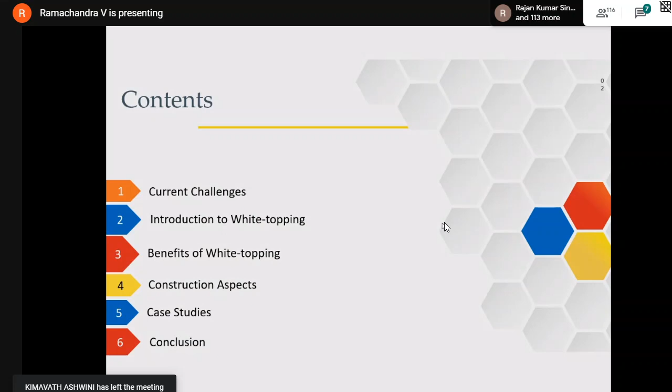Now let us go ahead to understand what is white topping, and what are the current challenges that we have on our Indian roads.

As you all know, potholes are the biggest threat to our country. Just to give you some numbers, pothole related deaths in our country were close to 3,600 deaths in India in the year 2017. In the same year, deaths related to terror related incidents due to terrorists were about 800 people, but only due to potholes, 3,600 people died. Therefore, just look at how serious this problem is.

Therefore, yes, I agree terrorism is a very big problem, but much more than that is the problem with these potholes, which we are not aware of. Therefore, having a pothole-free road should be our aim.

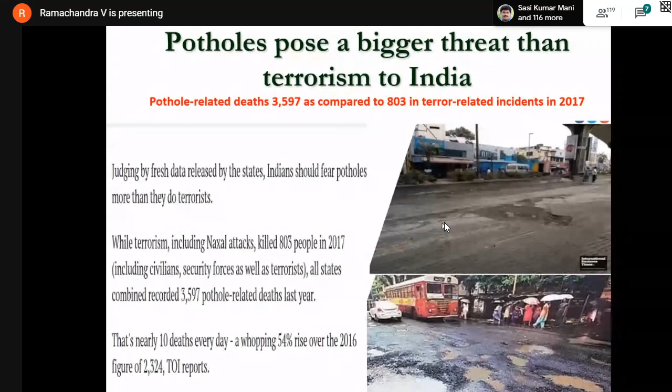Now, white topping can provide an excellent solution, particularly to eliminate potholes. There is a High Court judgment also of the High Court of Maharashtra. They have said that right to good roads is a part of fundamental rights of citizens. This judgment has come in the year 2015.

That was when somebody who was affected by the quality of roads in Maharashtra filed a petition in the High Court. They said because of potholes, somebody died in their family, and they went to the High Court. The High Court said that demanding good roads is a part of our fundamental rights as citizens of this country. Therefore, why I am saying this is that having good roads is very essential for our country, and we all should strive for that.

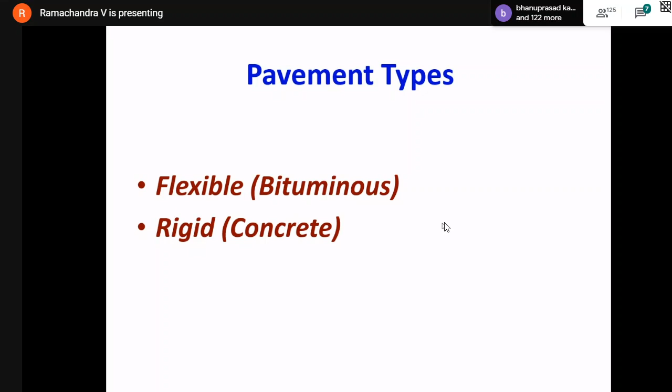Friends, as all of you know, your professors have taught you that there are mainly two types of roads. One is called the flexible pavement, which is a bitumen pavement. The other one is a rigid pavement, that is concrete pavement. There is a third variety also called composite pavements. In fact, white topping comes under composite pavements, where you have the bitumen layer below, and above that you have a rigid layer. Sometimes it is also called a composite pavement.

Now, what were we doing earlier? What was our past choice? We were normally going in for bitumen pavements always. What was the reason? It was because lack of funds was one of the reasons. In earlier days, in the 70s, 80s and all that, the cost of bitumen was very low, and whatever you can build, the cost of building 1 kilometer of concrete road, you can build 2 to 2.5 kilometers of bitumen road. Therefore, people thought, why do I spend money and build only 1 kilometer of concrete road? With the same money, I can build 2 or 2.5 kilometers of bitumen road. Therefore, that is always better for me, let me go in for bitumen roads.

But today, that is not the situation. Bitumen prices have gone up very steeply in recent decades. Therefore, the comparison between concrete pavements and bitumen pavements, even if you consider new roads, apple to apple comparison, the cost difference is not much. It is hardly about 10%. Therefore, this reason is not valid today.

Second thing is amenability to stage construction. In case of bitumen pavements, suppose we design that we need so much thickness of bitumen. Maybe as engineers, we would decide, no, I don't have so much money today, therefore let me construct only a small thickness now and add some more thickness 2 years later and some more thickness another 2 years later. That means stage construction is possible in case of bitumen pavements, whereas in case of concrete pavements, this facility is not there.

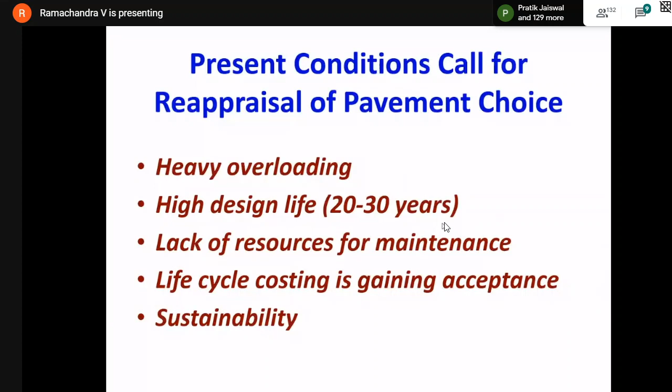Therefore, you don't have to spend money every 2 or 3 years for maintenance; resources for maintenance can be conserved. And these days, life cycle costing is gaining importance. I told you initially concrete roads may be expensive, but if you take the life cycle cost, the total cost over 25 to 30 years, concrete roads are much, much cheaper than bitumen roads. And concrete roads also contribute to sustainability, which I will cover in the second part of the lecture.

Now, this is the photograph of the Marine Drive Road in Mumbai. It is a cement concrete road, constructed in the year 1939. At that time, there was no ready-mix concrete available. It was manual concrete, there were no pavers, and with manual paving, this road was constructed in 1939.

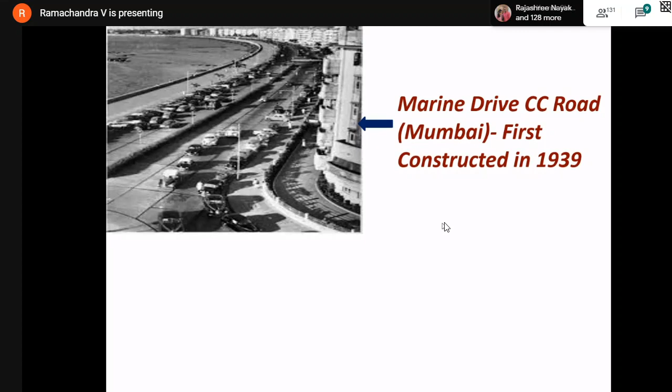You would appreciate that in Mumbai, even in the 1940s, road traffic was there, and more than that, the road is right next to the sea. So the chloride attack, the saltwater effect of seawater on the road and its subgrade, is always there 24/7. This road, constructed in 1939, lasted for more than 70 years, 73 years to be precise. So it was only in 2012, just 8 years back, that a new layer of concrete was put over the earlier layer. This road in Marine Drive has lived for 70 plus years and given excellent service.

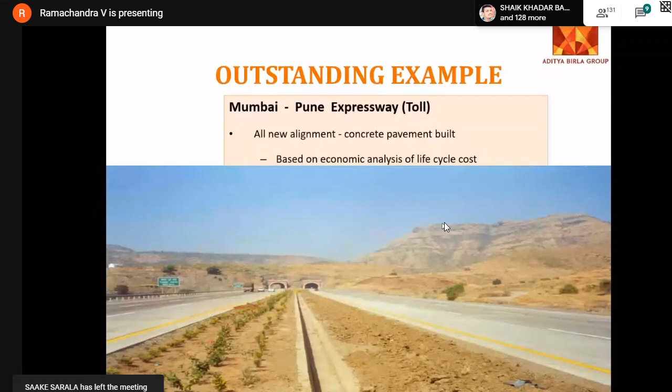Now there are several other examples. Take the Mumbai-Pune Expressway, built in the 1990s. It has already given service for more than 25 years and is giving excellent service to the nation. The recent one is the Yamuna Expressway between Noida and Agra, and the extension of that from Agra onwards.

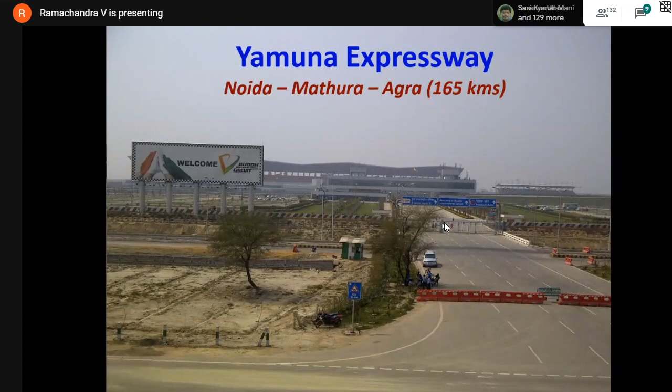This is the first phase of 165 kilometers of roads. This is an 8-lane concrete road, and you can see the view of it. It is an expressway where people travel at a speed of 140, 150 kilometers per hour. This is the sports stadium on one side of it. The quality of road is so good.

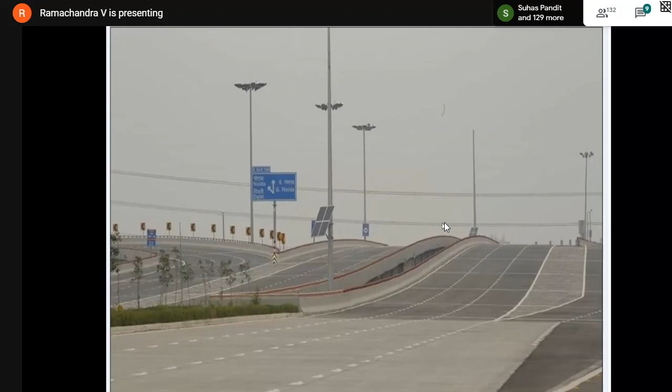One advantage of this road is that it is built with blended cement, that is PPC, not OPC. Generally I have heard people say that if you are constructing anything with high strength concrete, let's say M40 or M45 grade, you should always use OPC and 53 grade cement. But this road is built with PPC, Portland Pozzolana Cement, which is a blended cement with 30% fly ash.

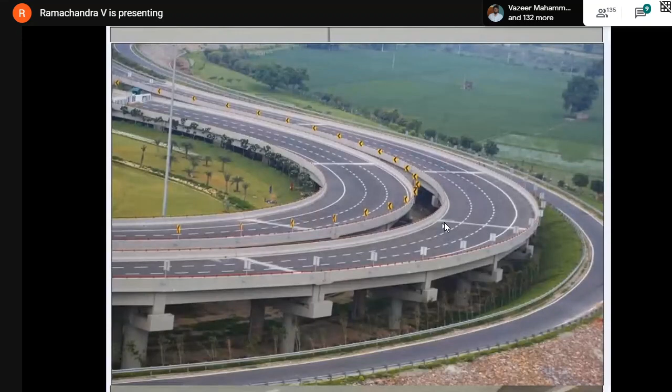Now you can look at the quality and performance of this road. This is not inferior to any roads you see in advanced countries. This is as good or even better than that. These are some other views. In fact, this road, which is close to Delhi, has also been tried out. When traffic was stopped, even Air Force planes, in case of emergency, can land on this road. That also has been tried on this road.

Now, coming back to bitumen pavements, as you all know, bitumen pavements have a lot of problems.

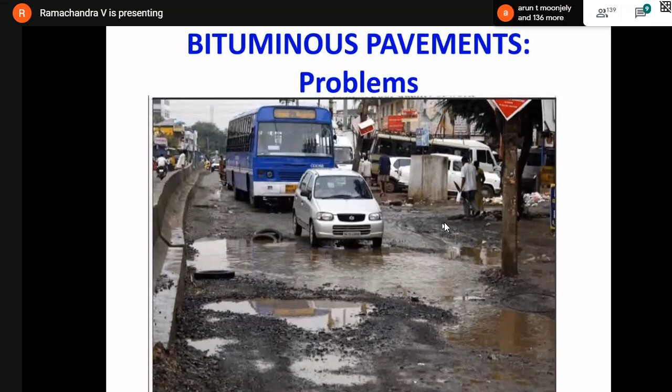Don't look at the color of the bus and think that only that particular city is very bad and my city is very good. I'm not just showing one photograph of Tamil Nadu; this is the problem everywhere. Any city you take, after a rainy season, particularly if the rains are very high, this is the kind of potholes you get almost in every city in India, whether it is Hyderabad, Vijayawada, Bangalore, Delhi, wherever it is.

Sometimes we wonder whether we are doing rainwater harvesting on our roads, it is so bad sometimes. That is the state of bitumen roads. Though we say bitumen roads should last for 5 years at least, in many places we have seen it go bad even after 2 years. After 1.5, 2, or 3 years it goes very bad, so you have to put one more layer of bitumen. You can't wait for 5 years.

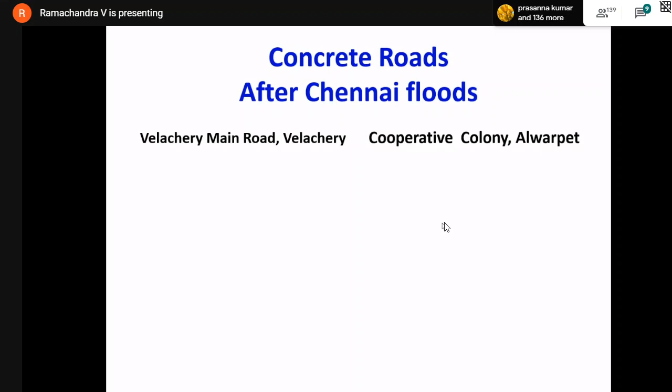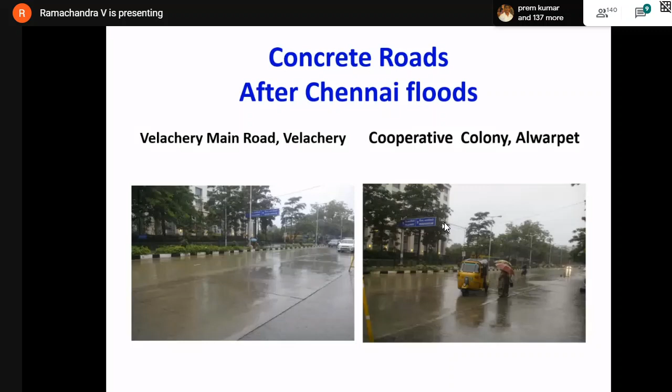We did a study in Chennai. This was the state of bitumen roads, whereas white topping, which was done in Chennai since 2012 -- Chennai has done more than 100 kilometers of white topping -- we studied the condition of this white topping after 7 years and very high floods in Chennai. After very high floods, this is the status of concrete roads in Chennai. You can see this after very heavy floods, with water standing on the roads for 7-8 days: concrete roads had no problem, whereas bitumen roads deteriorated.

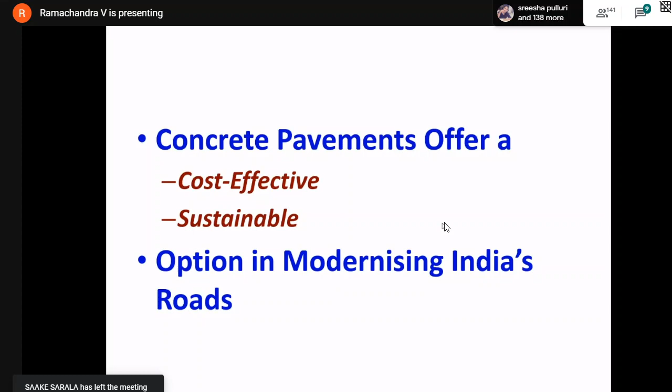Therefore, my point is that concrete pavements offer a very cost-effective and sustainable solution to India's roads. That is what I would like to say.

Now, before we go to the design aspects of these concrete roads, let me tell you a few things about load and its distribution. Your professors have taught you in strength of materials that pressure or stress is always equal to load divided by area. Now if a load of, let's say, 3000 kgs is moving on a road, what is the pressure or stress on the concrete, on the pavement below that? It is load divided by the cross-sectional area.

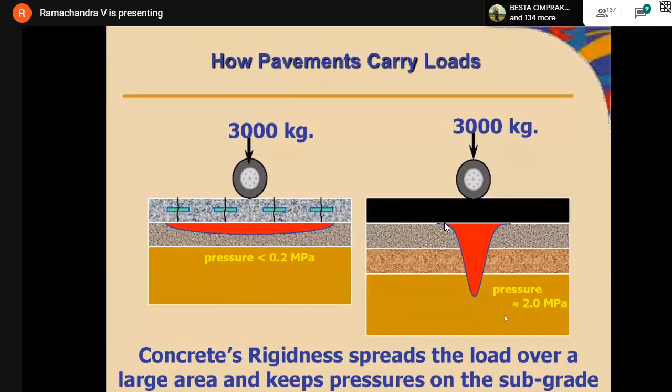Whereas in case of bitumen roads, it is 2 and in concrete it is 0.2, so the ratio is more than 10. That is the reason why in concrete roads the stresses on the pavement are much less than what you see in bitumen roads, and that is the reason for the long life of the structure.

Now I have a question for you, though in a digital lecture you can't answer. This is a question I generally ask students. Consider two cases: an elephant moving on the road, and a lady like Aishwarya Rai walking on the road. Who damages the road most? Remember, elephants weigh about 4,000 kgs. A 4,000 kg weight moving on the road versus Aishwarya Rai moving on the road - who damages the road most? This is the question to you.

Now let us analyze scientifically. Take Aishwarya Rai as well as the elephant. I know elephants generally weigh around 4,000 kgs. I really do not know how much Aishwarya Rai weighs, but I have assumed for my calculation that she weighs only 60 kgs.

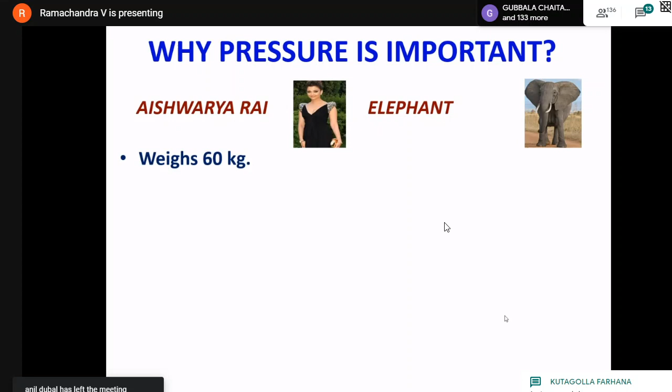She stands on shoes with pointed heels and toes, high-heeled shoes that she walks on. Therefore, pressure equals load divided by area: 60 kgs divided by 2 legs, each with 2 points, into 5 square centimeters per point, which is the area of cross-section. Dividing by all that, you get a pressure of 3 kg per square centimeter, or 0.3 Newton per millimeter squared in SI units.

Now let us go to the elephant. It weighs 4,000 kgs and stands on 4 legs, and each of these legs is quite wide - each leg measures 20 by 20 square centimeters. Therefore, load by area: 4,000 divided by 4 into 20 and 20. The pressure comes to 2.5 kg per square centimeter.

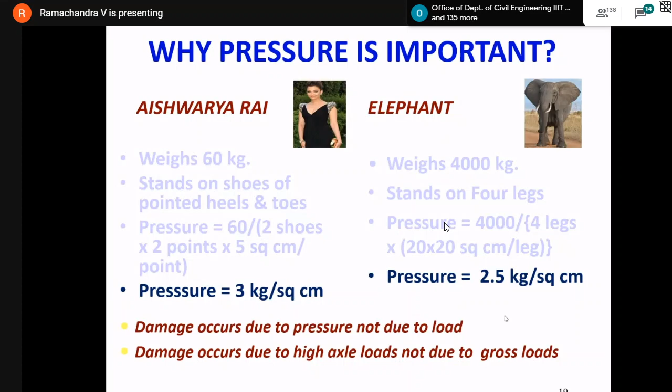Therefore, now the question is answered: Aishwarya Rai walking on the road damages it much more than an elephant walking on the road. Why I took these two examples is just to show that the load does not matter. What matters on roads, and what you must account for in design, is that damage always occurs due to pressure, not load.

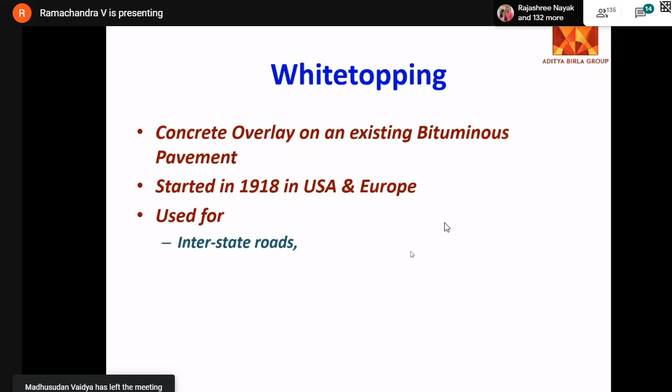As I said, a concrete overlay on an existing bitumen surface is called white topping. This is not a new technology - it started in the USA and Europe long back, in the 1900s and 1920s. It is used for all kinds of roads, whether interstate roads, primary and secondary highways, urban roads, or airports. The PCC, plain cement concrete used, is generally of grade M40. This overlay may or may not be bonded to the bitumen layer below. Now, what do we mean by this?

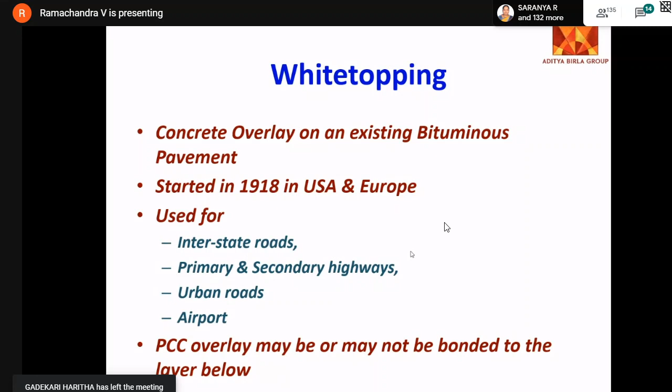That definitely there will be some bonding. An old bitumen layer is there, you have milled that, and above that you have put a concrete layer. Therefore, definitely there is some bonding, whether you consider that bonding in the design or not.

It may be bonded or it can be unbonded also. Before we go to the difference between bonded and unbonded, let us look at what is the white topping history in India. This started around 2000-2002 in places like Mumbai, Pune, Nagpur, and later came to Chennai. Then in South India, the first road was done in Bangalore, followed by Chennai and then Hyderabad.

Indian Roads Congress, based on practical experience in Mumbai, Pune, etc., brought out a special publication, SP76, in the year 2008. It was then revised in 2015. This is the first IRC code, SP76, and the later revised one available right now is SP76 of 2015. This is the latest code, and you can get a soft copy or hard copy from the IRC website.

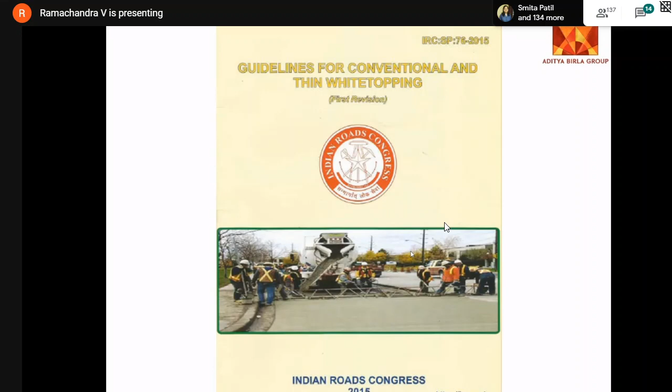Now, before we go ahead on white topping, let us look at the economics. This is the first question people will ask: compared to my bitumen road, how much more expensive is the white topping? As I said earlier, if you compare a new concrete road and a new bitumen road, the difference is hardly 10%. Whereas in case of white topping, the difference could be around 20 to 25%.

Let us take one standard case. For a standard case of a 1 kilometer road, 2 lane, meaning each lane is 3.5 meters wide, so the width of the road is 7 meters, 1 kilometer length, and the thickness of concrete is 150 mm, designed based on the IRC code. We designed the bitumen road also based on IRC 37.

What will be the cost, for a particular city - this I calculated last time for Hyderabad city. The total cost was coming to about 63.5 lakhs per kilometer for bitumen, around 63 lakhs. Whereas white topping would cost 76 lakhs. That means about 21% higher than the bitumen road - the initial cost is high by 21%.

Let us look at the maintenance cost. Initial cost I have taken from the previous slide: 63 for bitumen, 76 for white topping. Now after 5 years, you have to put bitumen concrete of 25mm, which would cost 18 lakhs. After 10 years, you have to put DBM of 40, dense bitumen macadam of 40, and BC 25, that comes to 45 lakhs. Another 5 years later, that means 15 years later, again one more BC you have to put, it will cost 18 lakhs. Therefore the total cost of construction will come to 144 lakhs.

Whereas in case of concrete white topping, initial costing is 76.7 lakhs, and maintenance is bare minimum - just maintenance of the joints. I have taken a very rough cost of 5 lakhs, though it will not cost that much, hardly 1 or 2 lakhs, not more. Even taking 5 lakhs, it comes to 91 lakhs.

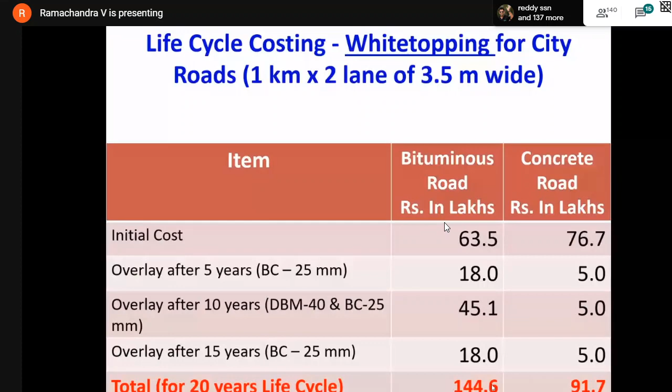If you take the life cycle costing for 20 years, white topping would cost 91 lakhs, whereas in the same 20 years bitumen roads would cost 144 lakhs. I have taken the present worth of all these values. Therefore, you can see that concrete roads are much, much cheaper in the long run if you consider 20 or 30 years of life.

There is no need actually. If you directly put concrete over the milled bitumen surface, there is some roughness of the surface. Therefore, there is always some amount of bonding between concrete and bitumen.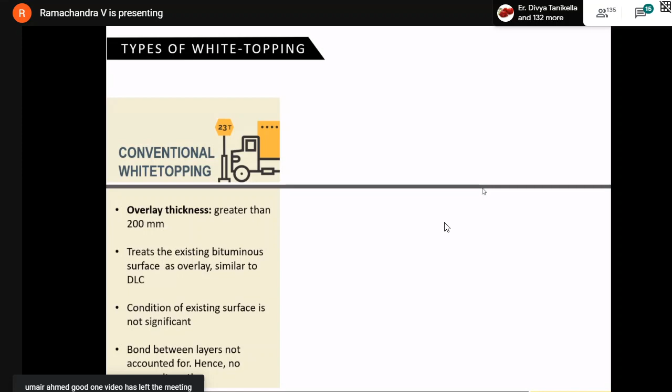The next one is thin white topping. Thin white topping is what you see in most city roads today. In this case, the overlay thickness of concrete is between 100 and 200 millimeters, that means 4 inches to 8 inches. The bond between layers is considered but not mandatory.

But look at the last point here - the joints are always at a very short spacing of 0.6 to 1.25 meters both ways. I'll show you photographs on this. The third variety is called ultra thin white topping. As the name itself says, the thickness is less than 4 inches, less than 100 mm. Therefore, it is called ultra thin white topping.

Generally this is not used for Indian roads. It is used only for internal roads where heavy traffic is not likely, suppose you have a colony, the inside roads of a small colony or gated community - there we can use 3 inches, 4 inches of concrete. Even in this case, the joints are at a shorter spacing of 0.6 to 1.25 meters. So the 3 types of white topping are just dependent on total thickness: 200 millimeters and above is conventional white topping, between 100 to 200 is thin white topping, and less than 100 is ultra thin white topping.

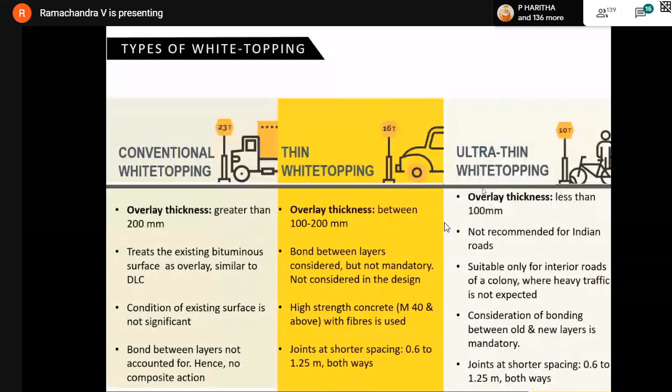But what I generally discuss when I say white topping is the second one, the thin white topping, which is more popular and is normally followed on our Indian roads.

Here you can see in this photograph, the joints, the groove cutting, are very close. This is the case of road number 10, Banjara Hills in Hyderabad, where this road is still doing well - it's already 6-7 years now, giving excellent service, and you can see the joints are hardly 1 meter by 1 meter, not like the earlier concrete roads of 3.5 or 4.5 meters.

Now, your professors have taught you in strength of materials that the stresses are directly proportional to the span. If it is a fully supported subgrade, it is proportional to L. Therefore, if the length or span is more, the bending moment would be much more; if the span is less, bending moment is always less. Therefore, a lesser span of 1 meter always helps in reducing the bending moment, reducing the flexure on concrete roads, so the thickness is also reduced - not like 250 or 300 mm, it is hardly 150 mm. This is the reason - because the spacing is reduced.

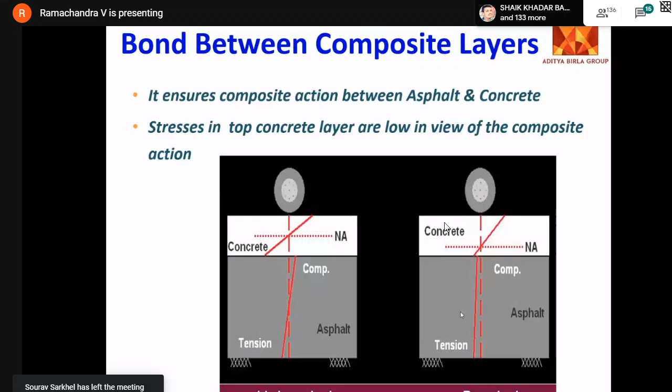Now, because of this, how much would the stress reduce? For this, I have taken the particular case of Nice Road in Bangalore, where this calculation was done. If you consider no bonding versus 100% bonding, and in between let us consider 25% bonding, you can see the stress reduction: even with 25% bonding, stresses are reduced by 26%. With 100% bonding, stresses are reduced by 58% - a huge decrease in stresses in case of concrete road.

If there is no bonding, the stress on concrete comes to 6 MPa. With 25% bonding, the stress comes to 4.4 MPa, which is 26% less. With 100% bonding, it comes to 2.5 MPa. This is what you are seeing in this graph - the stress in concrete greatly reduces due to consideration of bonding.

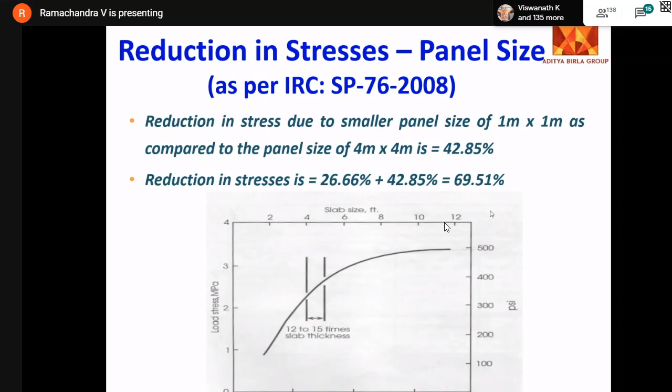Second thing is the panel size. Normally you take a 4 meter by 4 meter panel. Compared to that, in case of a 1 meter by 1 meter panel, which we do in white topping, the stresses are reduced by 42%. Therefore, if you add these two stresses - stresses due to bonding plus stresses due to reduction in spacing - the total reduction comes to 69 or even 70%. So compared to a normal concrete road of 4 meter by 4 meter, the stress reduction is 70%. That is the reason why white topping has lesser thickness.

Now, I am saying white topping is very good, but there are certain cases where white topping is not an option. We should know that while white topping is very good most of the time, it is not an option in at least some cases.

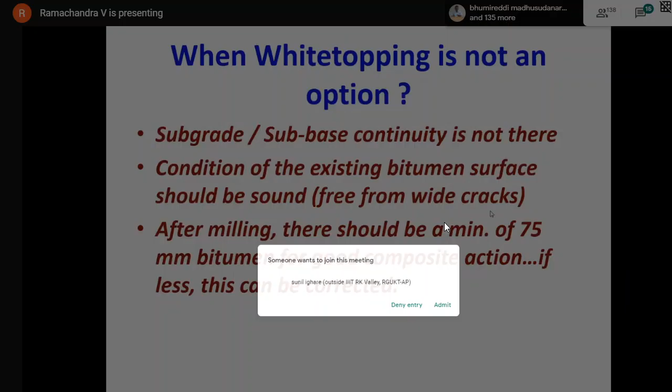What are these cases? When the subgrade or subbase continuity is not there - meaning when the subgrade and subbase are different. Sometimes you will see this in case of bitumen roads. Earlier a road was, say, 5 meters, then there was an expansion on both sides, a widening, and it became 7 meters. Now there is no subgrade continuity.

Then a correction is possible - you can put one layer of DLC, dry lean concrete, and over that put white topping. Second, the condition of the existing bitumen surface should be sound, meaning free from cracks. Third, I told you the top 1 inch should be milled out, and after milling there should be a minimum of 75 mm of bitumen remaining for good composite action. If it is not 75 mm, whatever is the difference, you can put dry lean concrete to that thickness, and above that put white topping. So solutions are available.

Now, what are the benefits and advantages of white topping? As I said, bitumen roads can stay for only 5 years, whereas white topping can last 20 to 25 years. There is fuel saving and emission reduction - I will explain this in the second half of my lecture. There is also energy saving, road safety is much better, and sustainability is much superior. Each of these I will explain in the second half of my lecture.

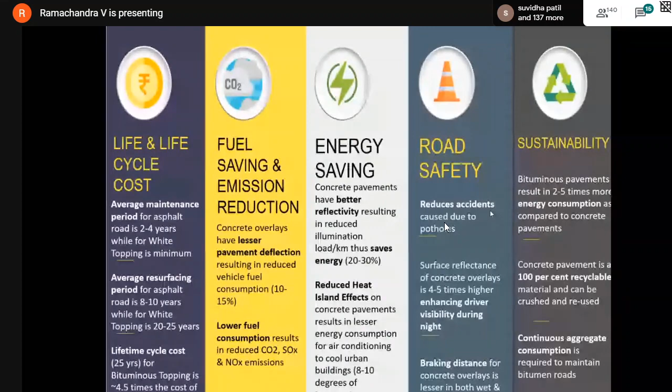Cost comparison I have already done, so let us go ahead now to braking distance and road safety.

Braking distance - all of you know that when you apply brakes on a car or bus, after what distance it stops. In case of bitumen roads, it stops at 190 feet, whereas in case of concrete roads with a dry surface, 162 feet is sufficient. Bitumen takes 190 feet. Therefore, the braking distance is always least in case of concrete roads.

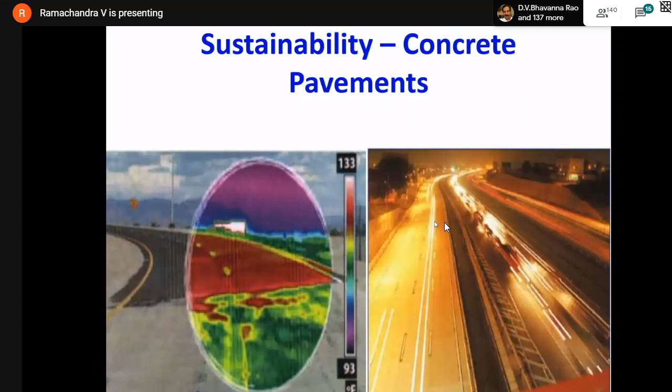Sustainability of concrete pavements. As you can see here, with the same number of electric poles on both sides, the bitumen road appears dark while the concrete road appears white, because concrete reflects light better. Near Belgaum, on the National Highway Golden Quadrilateral, one side was built as concrete road and another as bitumen road just to study the performance comparison. Concrete roads are always better.

How do we start the construction aspects? Let us now come to the construction aspects.

In case of concrete road, before doing anything, we should characterize the existing bitumen road, that is, determine its condition by visual inspection, and conduct laboratory and field tests such as the Benkelman beam test or the falling weight deflectometer test to determine the roughness of the surface or the modulus of subgrade reaction.

Coming to the PQC requirement, that is pavement quality concrete requirement, we should always go for M40 grade of concrete, so that the flexural strength would be in the range of 4.5 Newton per millimeter square.

The cement content and slump should be left to the designers. When we do the mix design, we can ensure that the cement content need not be very high, need not go to the maximum level of 450 kg per meter cube. By trials, with around 400 kg of cement, you can get a good concrete mix.

And what about the slump? It depends on the paver machine that you are using.

Oh, I think it went off. Yeah, I'll come back.

In concrete technology, you can use admixtures - mineral admixtures and chemical admixtures. Mineral admixtures means you can use fly ash, or GGBS, that is ground granulated slag. Use of chemical admixtures is very essential in case of high strength concrete.

This is about the slump test, which we must always do. All of you do this test in the concrete lab - you take a slump cone, make concrete, and put it in 3 layers, tamping each layer manually 25 times, filling it up to the top. Then you lift the slump cone, and the concrete slumps. You measure the difference between the top level and how much it has gone down - that is the slump.

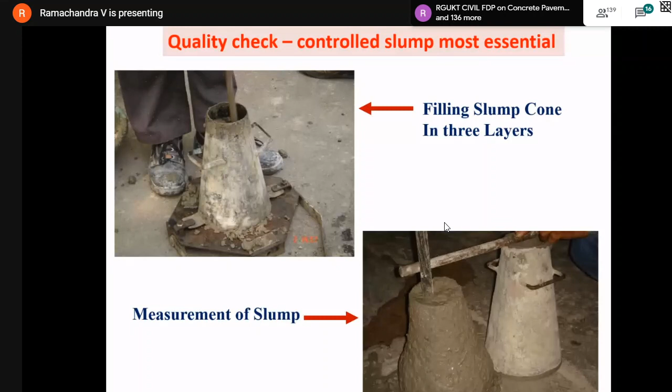The measurement of slump, whether it is 50 mm or 100 mm, is not very important. What is important is the cohesiveness of concrete. A cohesive concrete means water doesn't come out of it - that is called bleeding - and aggregates should not come out - that is called segregation. As you can see in this photograph, there is no bleeding and no segregation - this is a cohesive concrete. When you do the slump test, you should look at the cohesion of concrete, not just the slump value, which is not as important.

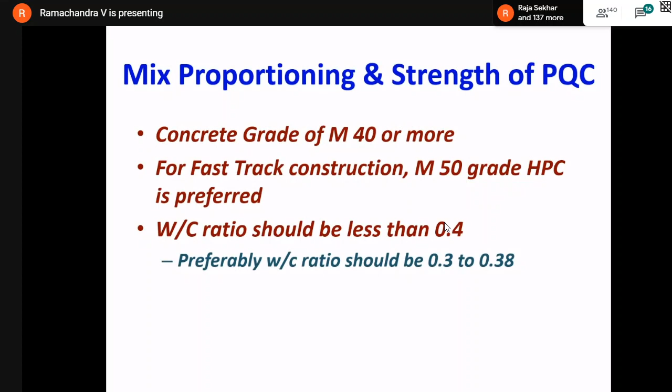Now, mix proportioning and concrete strength - the grade should be M40 or more. If you are going in for fast track construction, meaning the road has to be opened early for traffic, you have to go for M50 grade of concrete. High performance concrete is preferred, and the water cement ratio should always be less than 0.4, preferably in the range of 0.3 to 0.38, otherwise the strength will get reduced. Workability depends on the type of paving. And I would like to state that if you want higher strength of concrete, you will not get it by increasing the cement content.

But by reducing the water content - people have this mentality that if you want higher strength, you put more cement. No, that is not the thing. You can always get a higher strength by reducing the water content rather than increasing the cement content. Now you have the water cement ratio, water in the numerator, cement in the denominator. Instead of increasing the denominator, reduce the numerator, you will always get a better strength of concrete.

As per the code, whatever strength you have designed for, suppose you have designed for M45 grade of concrete, 45 MPa to be achieved. If you achieve 2/3 of that, that means 2/3 of 45 is 30 MPa. If the road has achieved 30 MPa of strength, you can open it for traffic. Suppose for M45 grade concrete you achieve 30 MPa in 2 or 3 days, the very next day you can open the road for traffic.

As I said, concrete roads are designed for flexure. The limitation on nominal size of aggregates should be there, 20 or 16 millimeters. You should avoid flaky aggregates - you have conducted this flakiness index test in your laboratory. Good gradation of particles up to the micron size - even the fine aggregates and coarse aggregates should have a good gradation. And you can go in for supplementary cementitious materials like fly ash, GGBS, and so on, as I have already said.

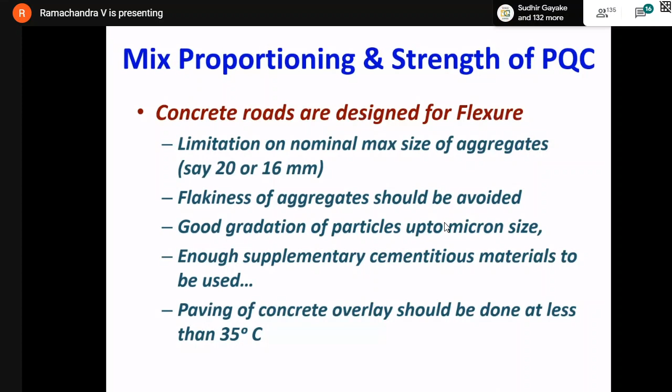And the paving of concrete overlay should be done at less than 35 degrees of day temperature. Therefore, if you are doing concrete road work during summer, if the day temperature is higher than 35 degrees, it is better to do concreting in the evening, or even night concreting is always the best. That will ensure that the concrete quality is very good.

Now, other than this, what are the other methods or things we should follow to ensure concrete roads are good? Or in other words, how not to construct bad concrete roads? Let us see the methods of construction. There are basically 3 methods of construction. One is the manual construction method, another is the fixed form paving method, and the third one is called the slip form paving method.

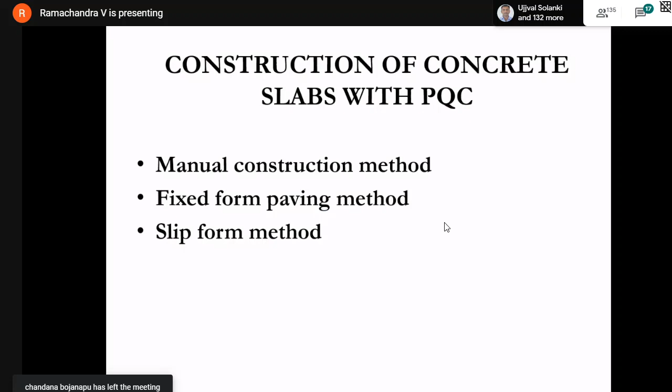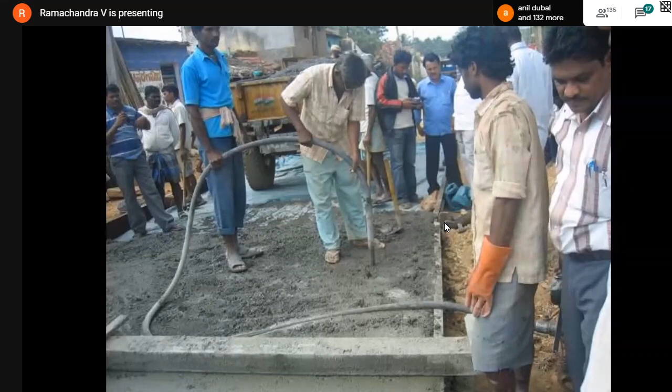Let us consider the manual method first. This is the earlier method of construction. These are all the equipments that are used for the manual construction method. The concrete is brought in tractors, poured, and we work on it manually. This was the old method of construction - do the manual construction, use the needle vibrator the way he is using it now, and use a plate vibrator for the surface and finish it.

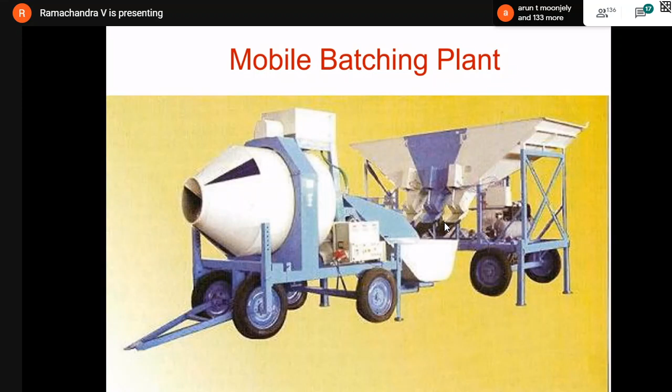But today you have the mobile batching plants. You don't have to worry about whether RMCs are there or not, but concrete should always be produced in batching plants like this. You can see this batching plant is mobile, it can be taken from place to place. It has bins or silos to store cement, sand, aggregates, water, and admixture dosage is also dispensed as per the design. Therefore you will get consistent quality of concrete.

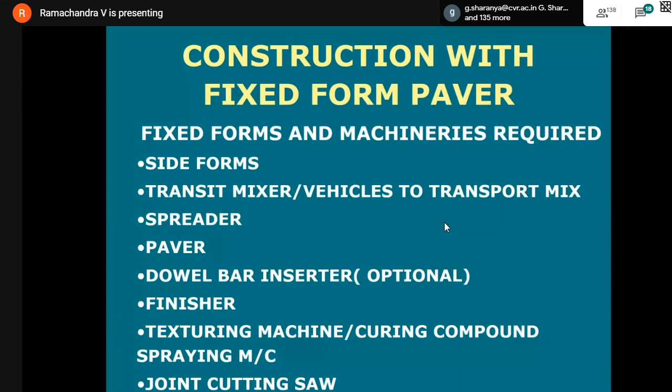If the width of the pavement is, let us say, 5 meters, you put 2 railings on either side of that 5 meters, and you pour concrete into the space in between and compact it. That is the fixed form - the form work is fixed, it doesn't move. So you have the paver machine standing there which will compact this. Once you put concrete onto it, the paver machine goes on that. Let us see how it works.

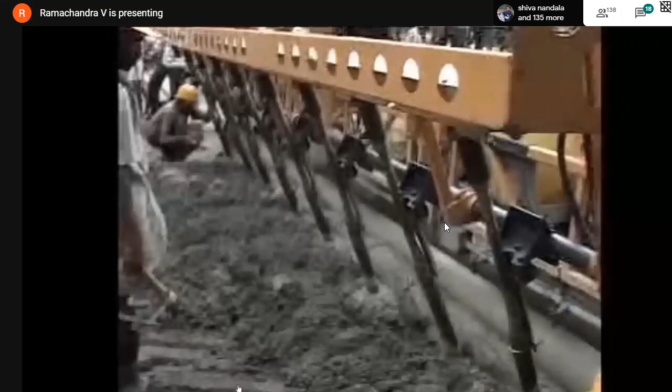As you can see in this, there are needle vibrators at regular intervals, and there is also a compression cylinder. It gives you a compression of 8 tons, a very strong compression plus vibration. Therefore you have vibro compaction, and the quality of concrete would be much, much superior to manual construction.

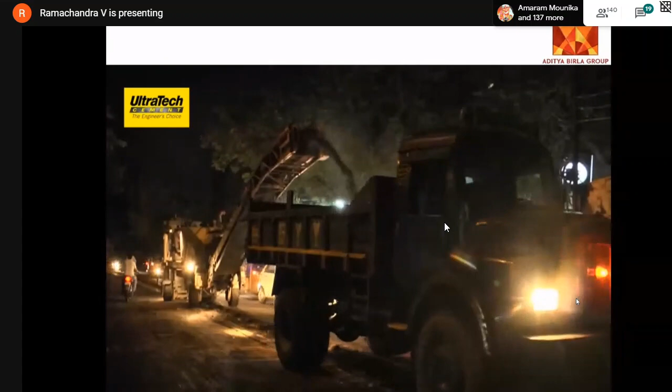You can see this small video. Let us now see how a white topping road is constructed. The first physical activity on the white topping concrete road construction site will be milling. Milling is the process of removing the weak, rotted top layer of the existing bitumen road using a miller. White topping work is done with a machine called a paver, which is either a fixed form paver or a slip form paver.

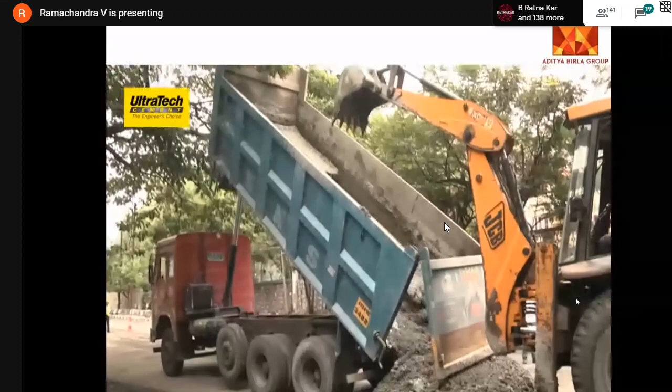The concrete for white topping work is normally grade M40. The compaction is achieved with vibrators and hydraulic pressing. After the paver machines complete their job, the concrete surface has to be finished similar to that of troweling. The high-end pavers are equipped with mechanical floaters, which do the job to a considerable extent.

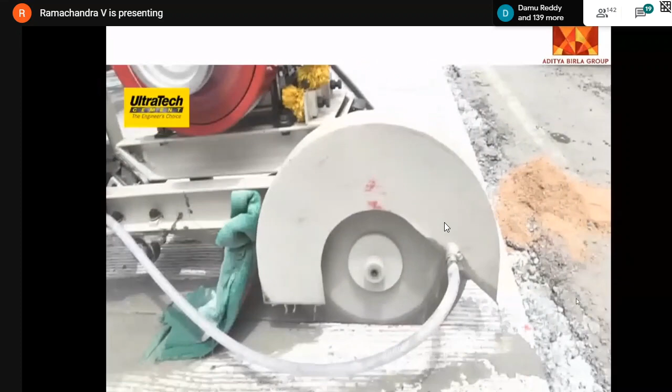Texturing can be done either manually or mechanically. Once the texturing is completed, and when concrete starts stiffening, a layer of curing compound is sprayed uniformly on the surface and on the sides of the concrete. After around 8 to 12 hours of concreting, pavement grooves are provided to a depth of 1/3 the depth of concrete. Traffic can generally be allowed on the surface after 7 days. Yes, that is called slip form paving.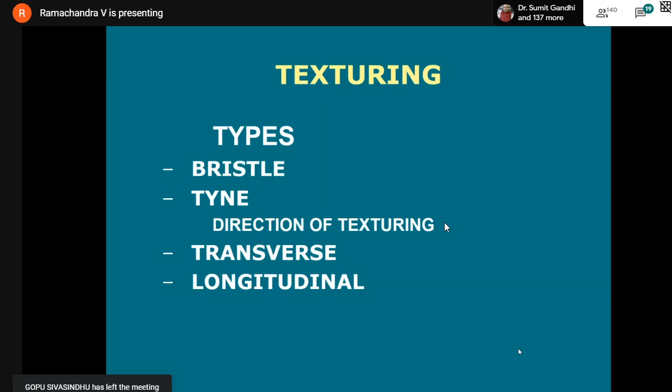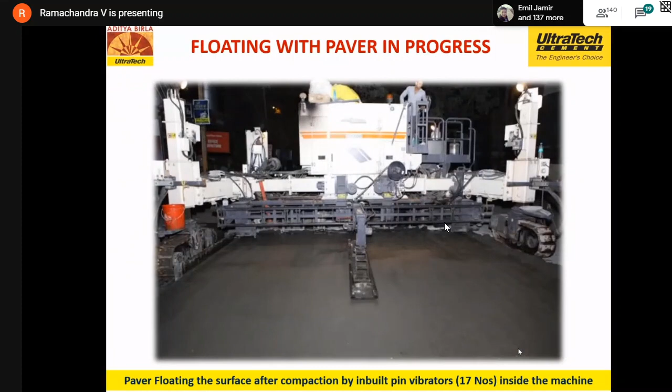Now, once the road is done, we should texture it. Texturing is because if the road becomes very smooth, it will create skidding. Therefore, you should do texturing. This is called tyne texturing. It can be done manually, or it can be done using a mechanical method. Here you can see the paver used in Hyderabad. It has the attachment for both smoothening the surface as well as for texturing.

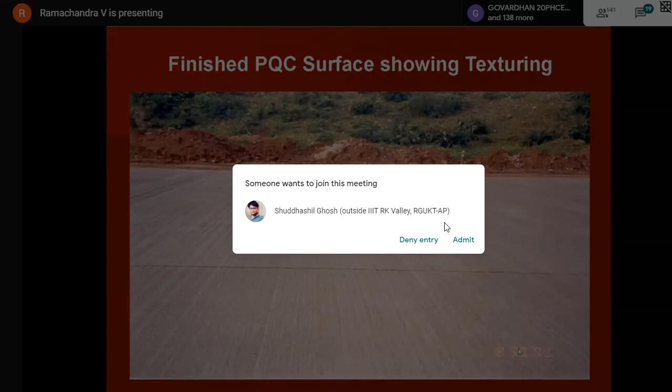Now, these are the different ways of texturing. This is called micro texturing, macro texturing, etc. Macro texturing gives a very uniform kind of texturing. And this is the finished surface showing the texturing.

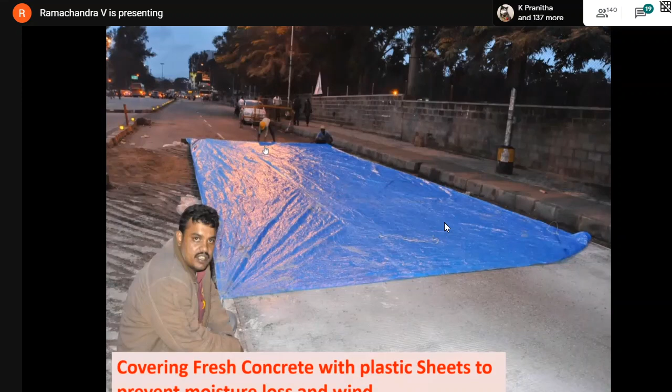Now, after this, we should put what is called curing compound. You should spray curing compound onto the surface. I think somebody is spraying curing compound here. You can see that. Covering it with a plastic sheet is also another method. Why is this to be done? It is to ensure that no surface cracks appear on concrete due to plastic shrinkage. Generally, highly admixed concretes will have plastic shrinkage cracks. One way to eliminate that is to put a plastic sheet. Another way is to spray curing compound, which makes a thin wax layer on the surface to avoid cracking.

After that, we must do curing by ponding for 3 days or 1 week till the road is open to traffic, or it is covered with gunny bag rolls.

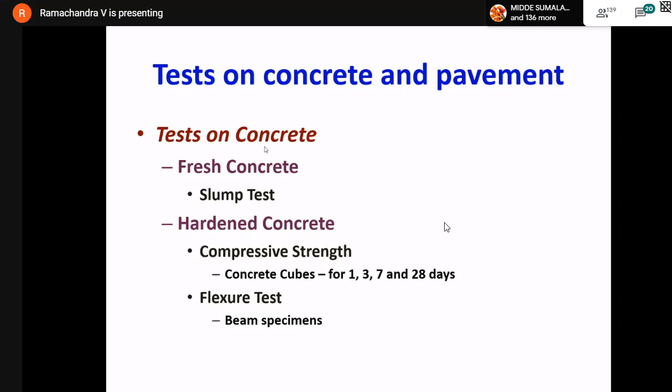As far as tests on concrete are concerned, tests are conducted on fresh concrete, that is the slump test. For hardened concrete, we take cubes and test strength at 1 day, 7 days, 28 days, and so on. We also do the beam test to determine flexural strength. For strength after some time, we can take cores and determine the core strength. After, say, 10 years, if you take a core, you can determine the residual strength of concrete. To test pavement quality, you do the fatigue test and abrasion test.

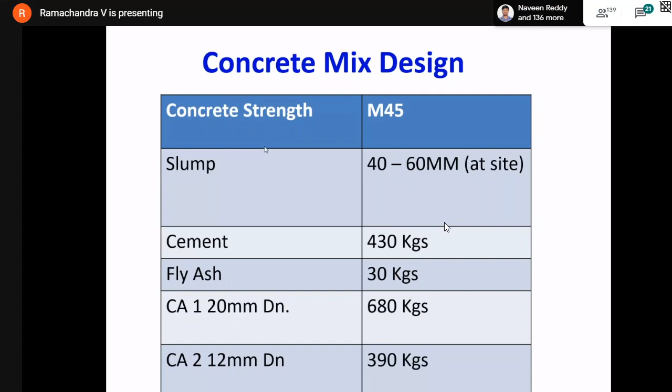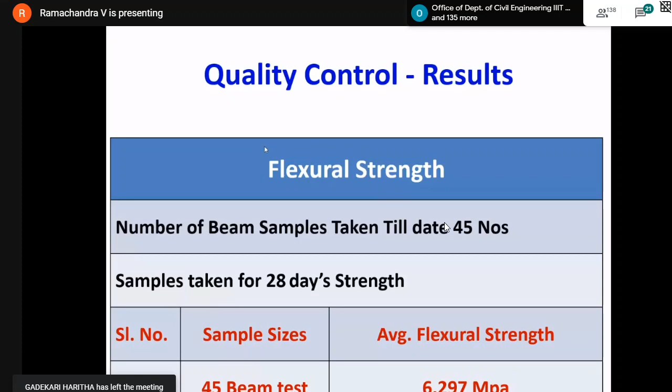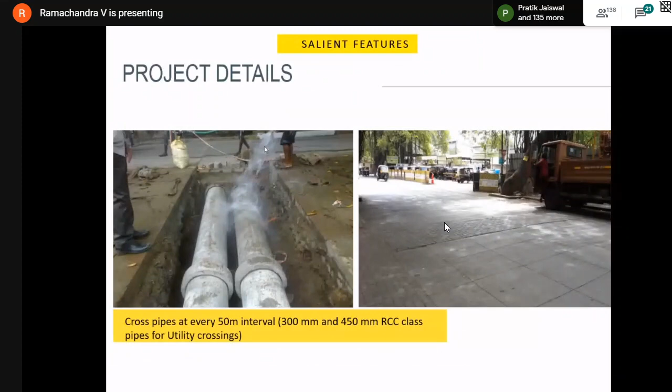These are the details of the technical specifications. 425 kgs of cement was used, additional GGBS was used, and so on. Cross ducts were provided at 50-meter intervals. Wherever the ducts were, they were all marked so that for future accessing of utilities, it would be better.

Now let us take the example of one highway road. This is the outer ring road in Bangalore, called the NICE road. NICE stands for Nandi Infrastructure Corridor Enterprises Road. It is about 10 kilometers and the design life is 20 years. Very heavy traffic on this, more than 8,500 commercial vehicles per day; cars and other vehicles are not counted at all, only commercial vehicles. Joint spacing is 1.2 by 1.2 meters. Thickness was designed as 180 millimeters.

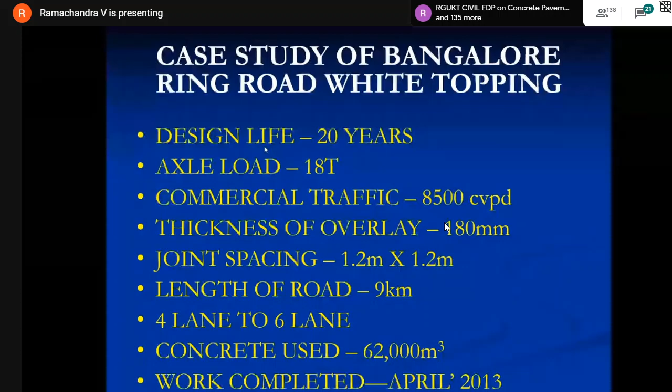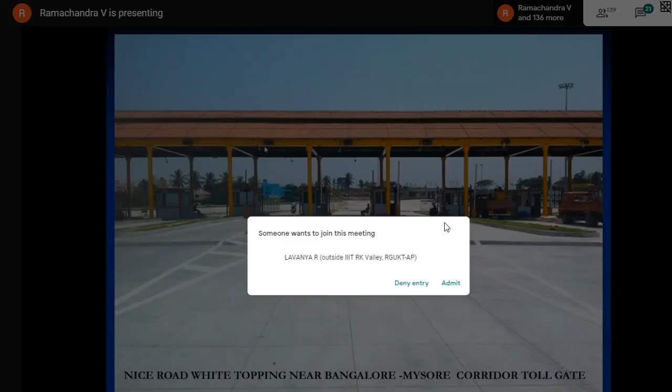So during construction, you can see the difference between the bitumen road and concrete road by looking at the color, right? These are all the different photographs of this. Therefore, thank you, I complete the first part of my presentation.

Maybe we can take some questions now before going into the second part.